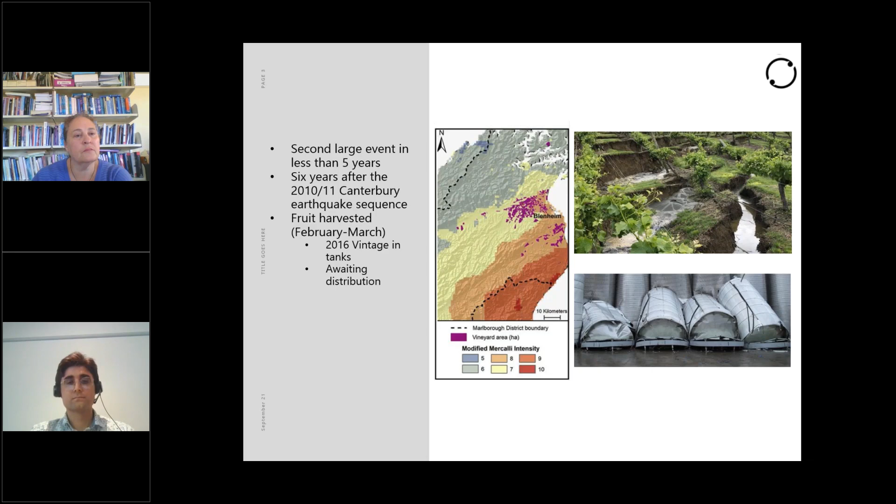For the wine industry, the earthquake came at a critical time as well. The 2016 vintage was in tanks, and it was awaiting distribution. So there was a significant volume of wine held on premises and in bottling factories when the earthquake occurred. Next.

So with funding from MPI, we were successful in starting a project enhancing earthquake resilience in the wine industry, which was funded through MPI's Primary Industries Earthquake Recovery Fund, which was initiated soon after the earthquake. The overall aim of the project, which was a collaboration between Manaaki Whenua, New Zealand Winegrowers, Lincoln and Auckland universities, was to look at key vulnerabilities and identify resilience interventions throughout the value chain. So the overall aim was to look from the vineyard through to operations and market and understand how the interaction and feedback between impacts and implications had consequences for resilience, future preparedness, and so on.

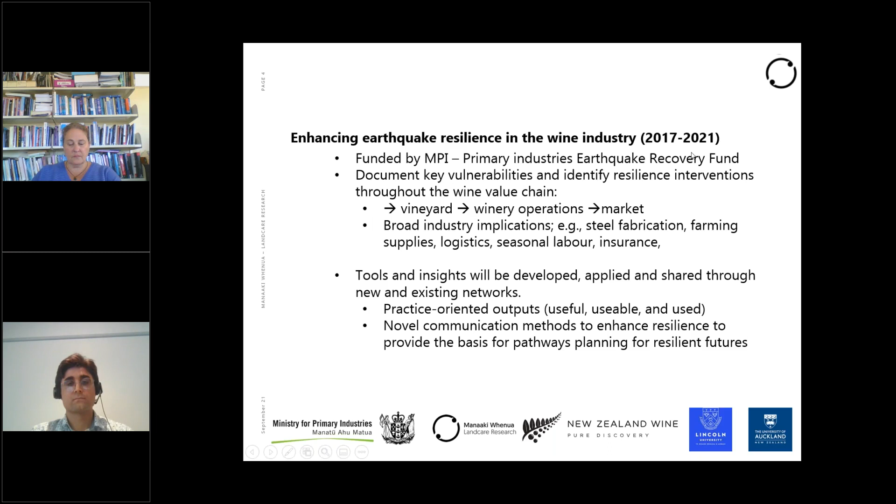The project has run for about 3 years, and then we were delayed with COVID in terms of running the actual extension and outreach. And so this portion of these webinars, as well as some fact sheets and vineyard tours coming up in the next couple of months, are really part of a way to extend the knowledge that we learned, to continue to build on the networks, and to produce outputs that are actually useful, usable, and used for the industry. Next.

So the project had 3 research aims. The first was to document the structural impacts and the wine industry response. Second was to understand the interactions between the social and ecological systems, so the markets, human behavior, decision-making, distribution, and use that information to explore new and appropriate initiatives. And finally, to initiate and enhance knowledge sharing to ensure that these lessons and experiences are shared with the rest of the wine industry.

As Mohsen will point out, Marlborough is not unique in that many of New Zealand's wine regions are actually located in significantly seismically active areas. While they may not have experienced earthquakes in the recent past, many of them, such as Hawke's Bay, have experienced them in the last century, and others are likely to experience them at some point in the future. So how the lessons and experiences from Marlborough can be transferred elsewhere, both in terms of engineering solutions as well as how to manage market-related risks, is a key objective. Next.

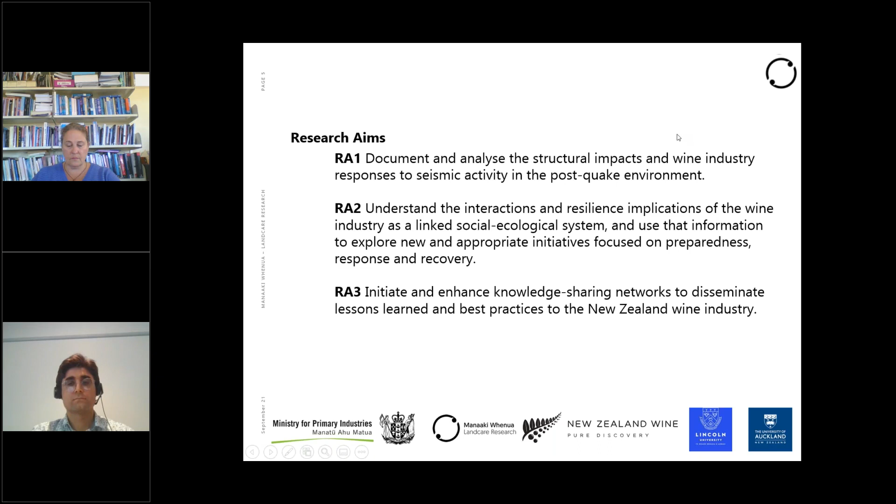And so from our perspective, where we're coming from is really this applied resilience science. Next. And when we talk about resilience, we really mean the ability to adapt. How can systems adapt? How can they reorganize? And how can we learn so that we don't continue to make the same mistakes, or when there is an earthquake or a damaging event, simply build back or revert back to pre-existing ways of doing things, in a sense, locking in vulnerabilities or patterns rather than actually transforming or changing the system. Next.

And so what we are really interested in is this ability to increase capability and capacity to buffer against shocks and stresses and to avoid critical tipping points or thresholds that may shift systems into undesirable states. And this is particularly important not only for the wine industry, but for other primary industries as they face the combined impacts of earthquakes, climate change, market-related shocks.

We've seen recently COVID, of course, having a significant impact on the wine industry. And with primary industries making up a big portion of New Zealand's economy, ensuring and enhancing the resilience of these industries is vital to our long-term future. Next.

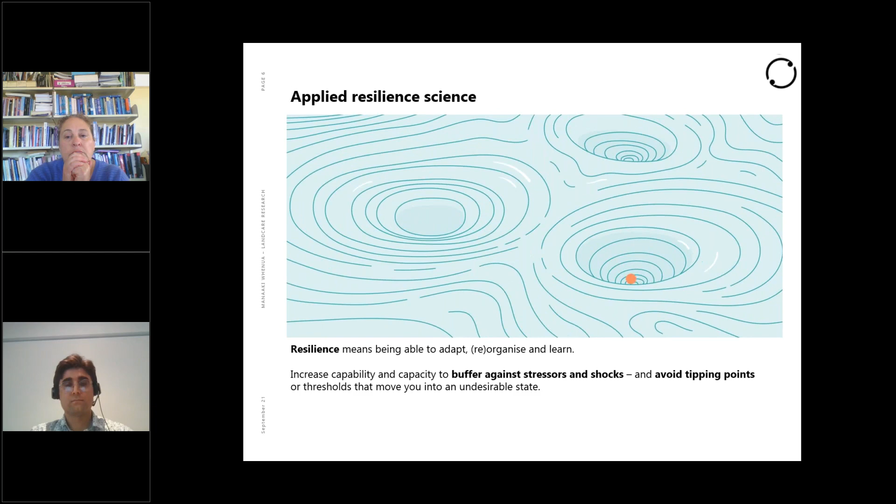And so over the next couple of months, we're presenting a series of webinars, the first of which is today, looking at seismic resilience of wine tanks and catwalks. The second one in November, we'll be reflecting on workforce resilience. The wine industry learned some significant lessons from the earthquakes and have made changes to the way they manage people. And many of those things came into play when they were needing to manage COVID response.

And so we have a webinar planned, joining producers and other industry and community representatives to discuss some of those changes and how those lessons have been applied, not only in New Zealand, but some of them have been taken up internationally as well. And finally, we'll be looking at resilience in the wine supply chain. So again, there were significant impacts for supply chain and distribution following the immediate aftermath of the earthquake. And how can we mitigate some of those risks going forward?

And what are the lessons and the similarities between the 2016 earthquake disruption and the ongoing pandemic? And how can some of those lessons be applied, and what else can be done in the future?

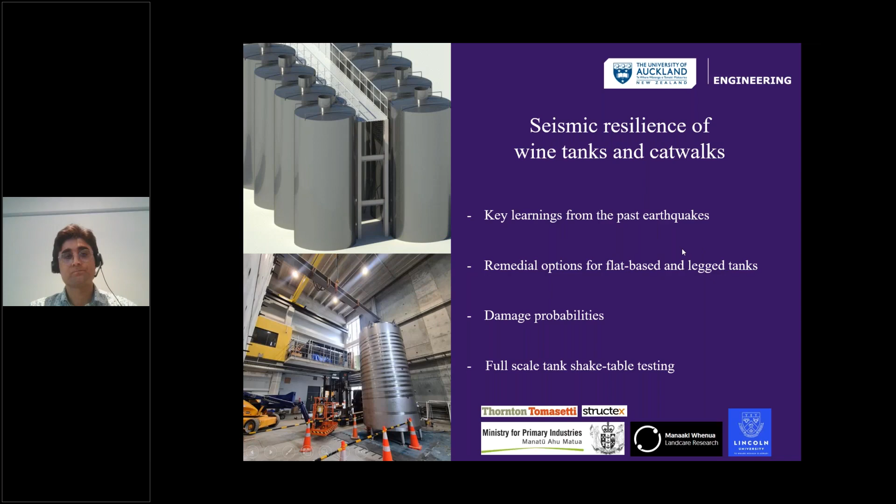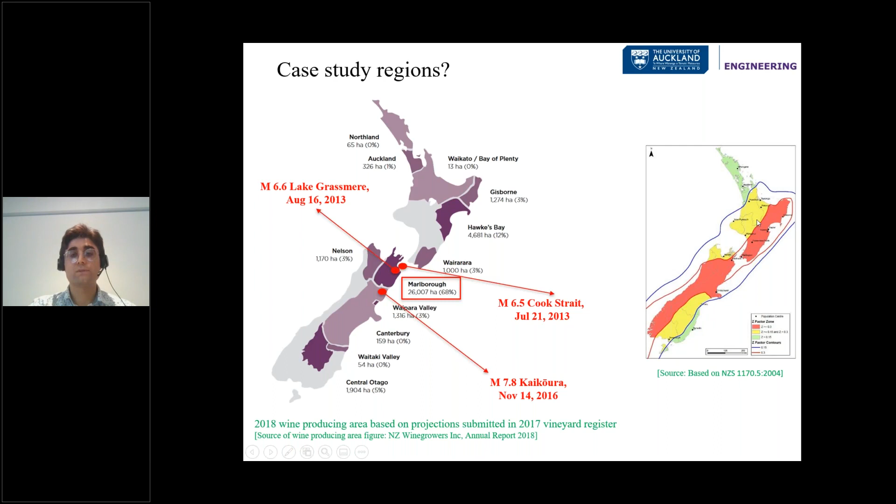Our case study region was Marlborough, and as you may know, it's a very important region in terms of wine production, and almost 70% of wine in New Zealand is produced in this area. And over the past 10 years, there have been several significant earthquakes that impacted the Marlborough region, 2 in 2013 and the 2016 Kaikōura earthquake with a magnitude of 7.8. And also, based on the New Zealand seismic map, the Marlborough region is located in a high seismic area.

There are 4 structural elements in a winery. We have buildings, and their functionality could be different, from warehouses to restaurants. We have catwalks. We have 2 types of catwalks, self-supported and tank-supported catwalks. And their main purpose is to provide access to the top part of the tank, and they are lightweight steel structures. We have also 2 types of racking system: the new generation, which performed well following our observations after the earthquake, and the old generation, which performed poorly.

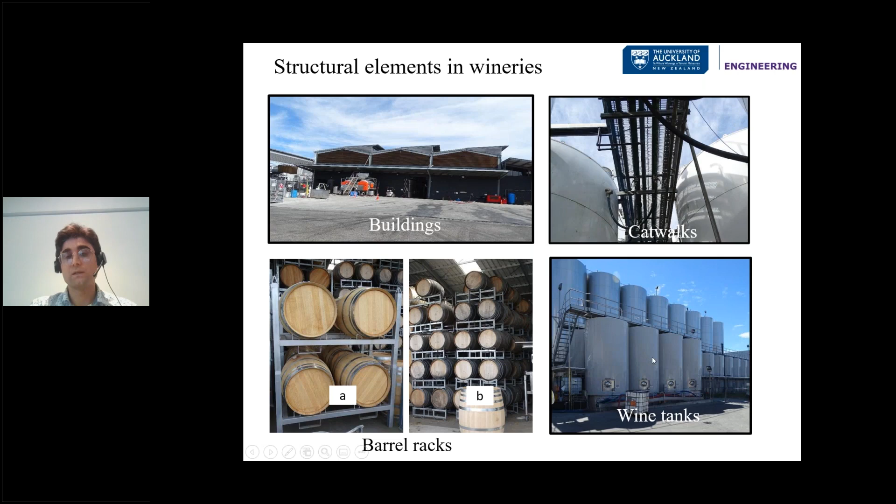And we have wine tanks. Wine tanks are slender stainless steel structures with a very thin tank wall. And the main difference between the wine tanks and other liquid storage tanks is that they are slender.

We have two types of wine tanks: flat base tanks and legged tanks. Let's have a look at a typical flat base tank.

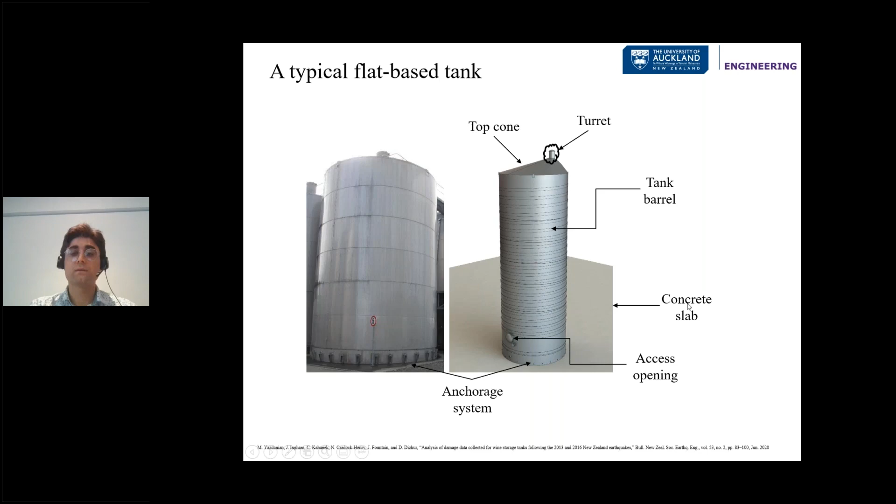Normally, flat base tanks are composed of a turret at the top of the tank, top cone or roof, tank barrel or tank wall. There are normally several openings for access on tanks, and some of these access openings are only for pipes. And we have an anchorage system, but there are different types of anchorage systems, and I will later explain about their performance during earthquakes. And we have a concrete slab sitting below the tank.

For the case of a legged tank, we have all those elements plus legs. So the tank structure is sitting on legs, and they can be either anchored or unanchored to the concrete slab.

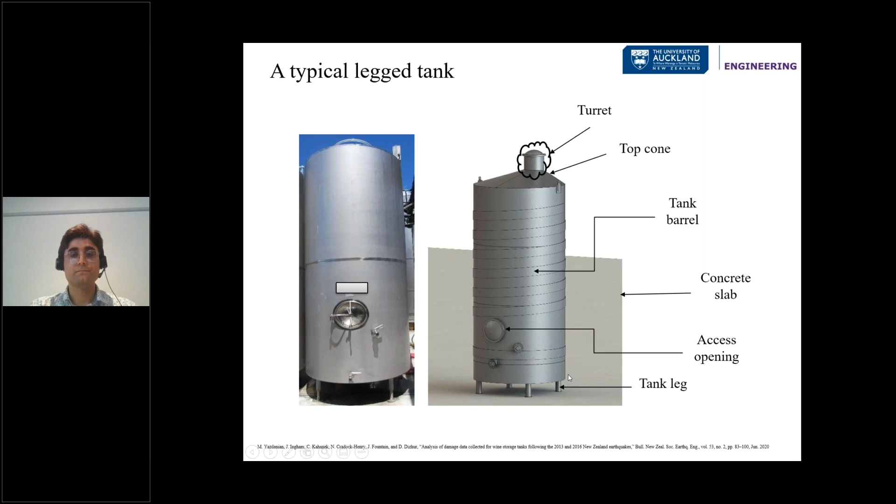Following the 2016 Kaikōura earthquake, we teamed up with structural engineers, and we inspected several wineries, and we held several workshops, and all in all, we collected the largest damage database for wine storage tanks in the world, which is basically composed of two damage data sets, and today I'm only talking about the largest damage data set that we have. Our damage data set was covering both flat-based and legged tanks, and also covering data from the 2013 earthquakes and 2016 earthquakes.

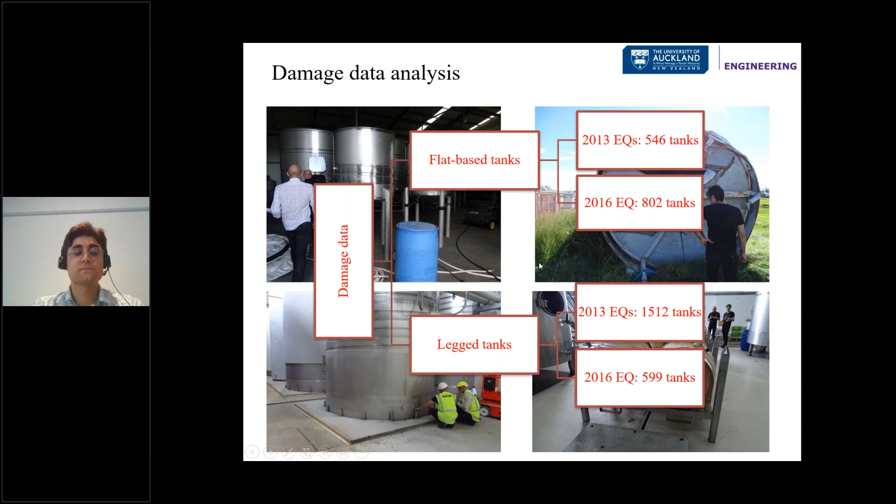So let's see an analysis of this damage data. This is a very high-level overall damage data. We have analyzed all data in detail, but because of time, I will just give an overall percentage.

For the case of flat-based tanks, in the 2013 earthquakes, we noted that 73% of the tanks in our inventory sustained damage, while this damage percentage reduced to 69% in the 2016 Kaikōura earthquake. Although this earthquake had a larger magnitude compared with the 2013 earthquake, the damage percentage still reduced, which could be because some resilience measures were undertaken following the 2013 earthquakes, and some lessons were learned from that earthquake. That shows a good point that possibly, because of the lessons learned from the 2013 and 2016 earthquakes, wineries may now have more resilience.

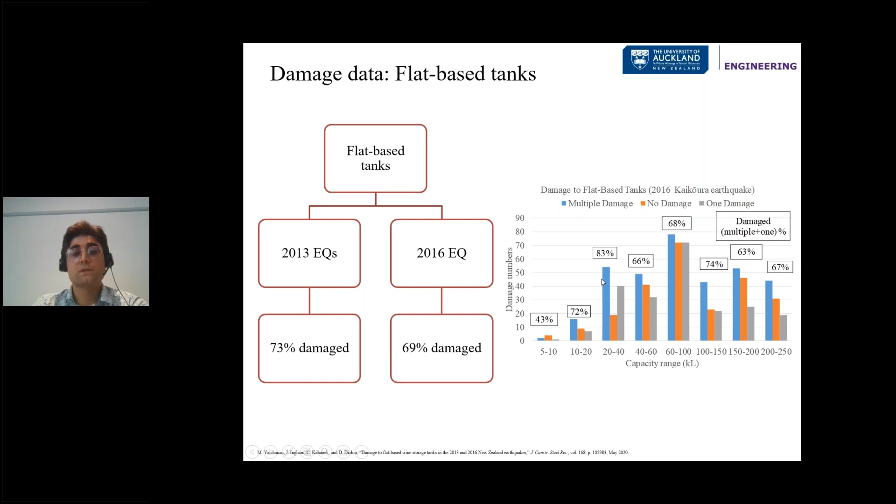We also analyzed the percentage of damage for different capacity ranges. On the horizontal line, we have capacity ranges, and we have damage percentage for each capacity group. Surprisingly, we can see that tanks with a capacity range of 20 to 40 kiloliters sustained the largest damage in the 2016 Kaikōura earthquake. It was interesting to see that some of the largest wine tanks sustained less damage compared with smaller tanks.

We also analyzed damage percentage to different sections of the tank. Based on our damage data from the 2013 and 2016 earthquakes, we can see that damage percentage to anchors reduced from 47% in 2013 to 23% in 2016. That is because we noticed that several wineries actually implemented and used novel anchorage systems, and that shows the importance of resilience.

But damage percentage to the barrel increased from 28% to 54%. Some of the typical types of damage to the barrels, and the most important types of damage, are diamond shape buckling—named because it's similar to a diamond—elephant foot buckling, as well as catwalk indent. Catwalk indent impacted the tank significantly, and I will explain about this later.

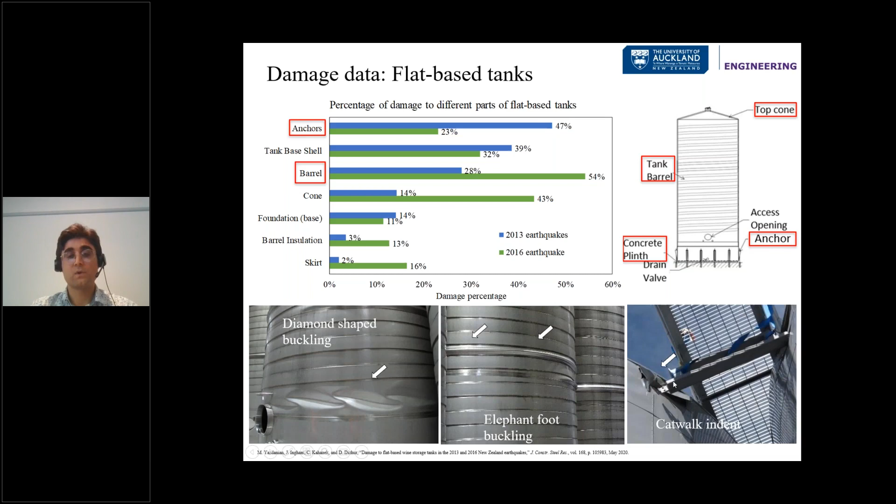We also investigated the performance of tanks with different anchorage systems, and we analyzed all the data that we had and identified that tanks with energy dissipation devices sustained less damage compared with other tanks. That again shows the importance of having a resilience option in place.

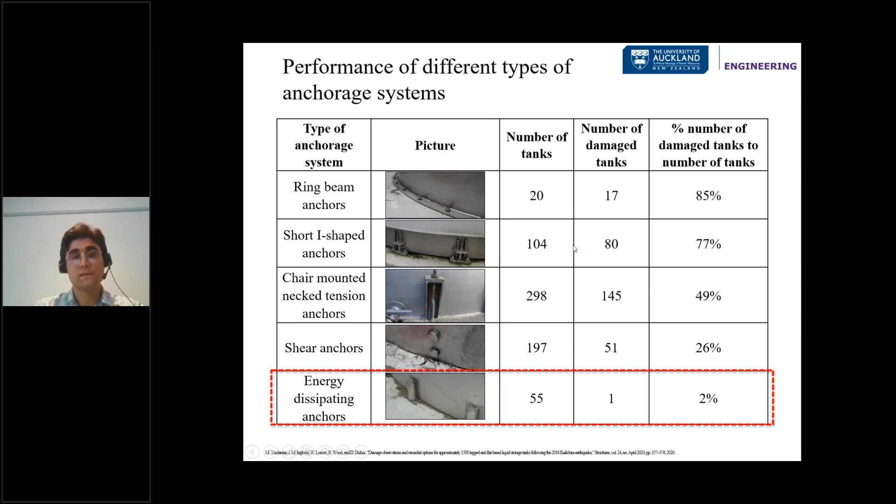For the case of legged tanks, we found in our data that 50% of the tanks sustained damage in the 2013 earthquakes, and this damage percentage increased to 57% in the 2016 Kaikōura earthquake. That makes sense because the Kaikōura earthquake had a larger magnitude. Again, similar figures are extracted for the legged tanks, when we look at damage percentage for tanks with different capacity ranges. Unlike flat-based tanks, we can see that the percentage of damage increased for the case of legged tanks.

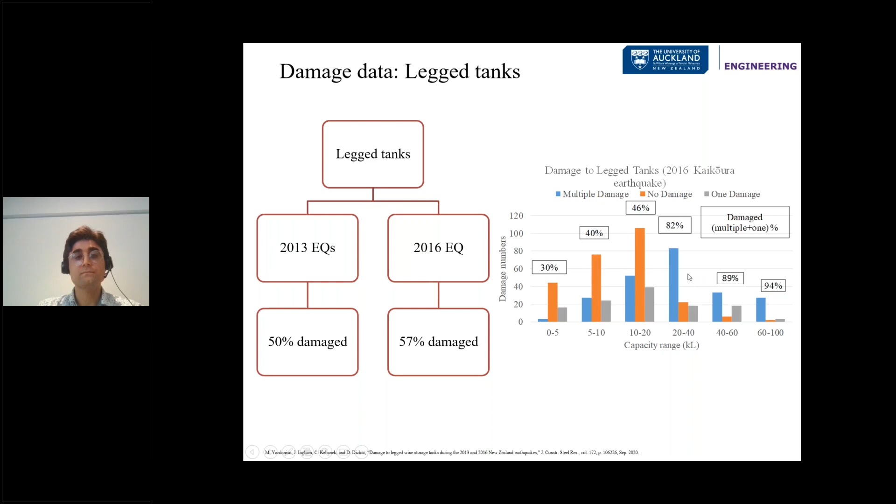We also analyzed the damage percentage to different sections of the tank, and as expected, we noted that legs or the frame of the tank sustained the largest damage in both the 2013 and 2016 earthquakes. Some of the typical damage to the legs are leg buckling, external or internal leg tilting, brace buckling, and global movement. Global movement means that the tank has shifted to the other side, and that can be identified by looking at the signs left in its original location.

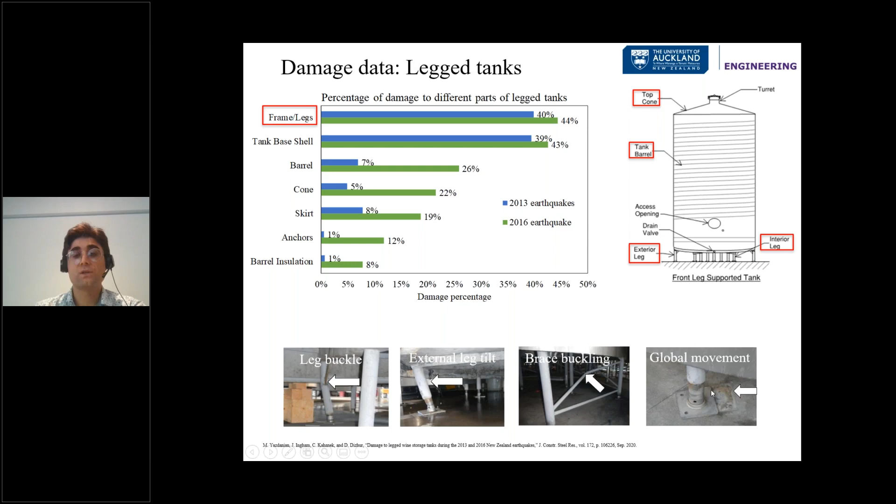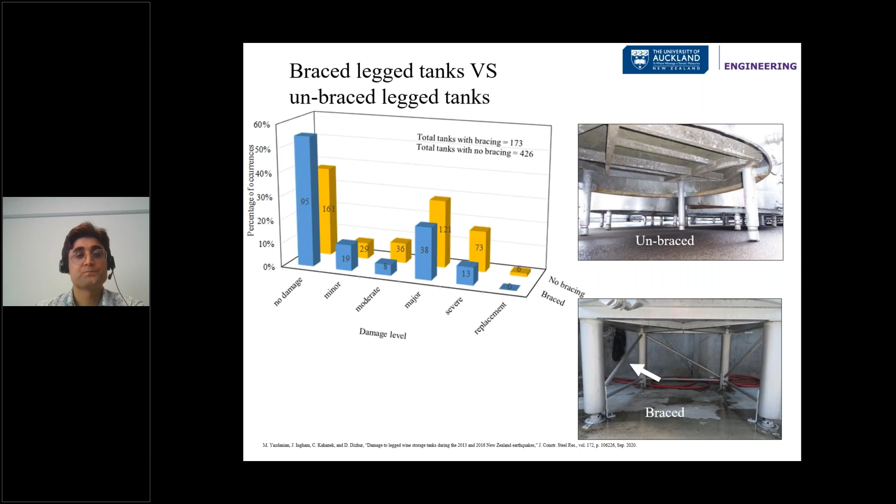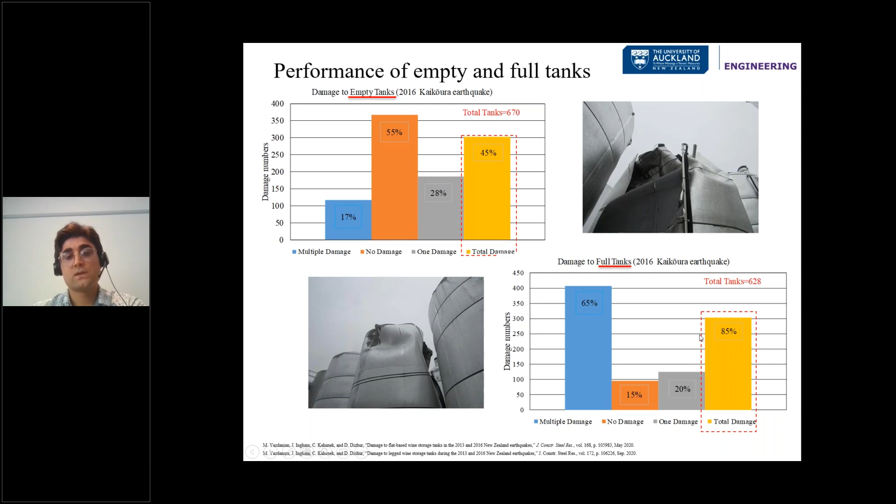We also investigated the performance of empty and full tanks. On the top of the slide, we have the figures for empty tanks, and you can see that the total percentage of damage for empty tanks was 45%, while the percentage of damage to the full tanks on the bottom of the slide was nearly twice at 85%. That shows the importance of liquid level and how it can impact the performance of the tank.

Some of the key learnings from our wine tank damage data are written here. Basically, the damage type that caused tank replacement based on our observation was pounding and overturning, and that was because some legged tanks could overturn or impact their neighboring tanks. Some parameters influencing the damage percentage were level of liquid, the capacity of the tank, and the anchorage system.

We also understood that 86% of tanks with damaged anchors required or at least recommended anchor replacement. And above 90% of tanks having buckling, such as elephant foot buckling or diamond shape buckling, require different sorts of repairs. And as I discussed, braced legged tanks perform better than unbraced legged tanks.

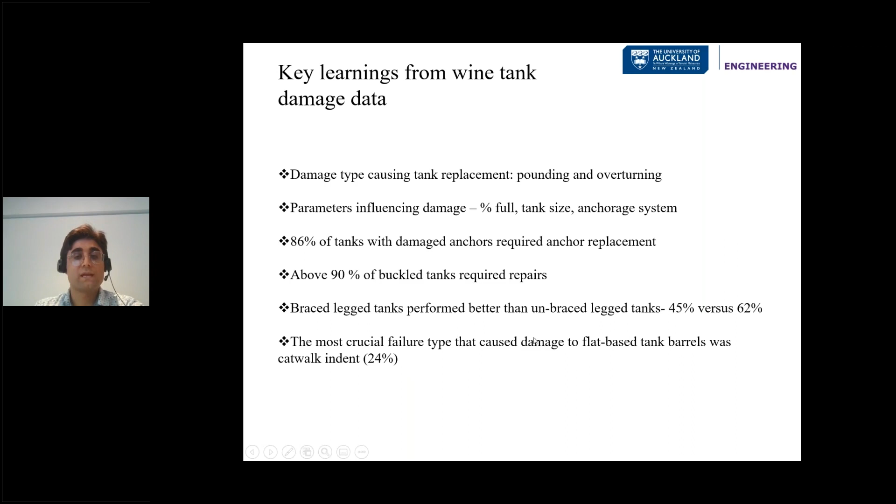One of the surprising and interesting things that we noted in our data was related to catwalks and how they can impact the wine tanks. Based on our data, we understood that 24% catwalk indent was noted for flat-based tanks. And that led us to start new research on the seismic performance of catwalks.

We have two types of catwalks: tank-supported catwalks, when the catwalk has a joint with the tank wall and the tank is acting as the main frame or support for the catwalk. And on the right, we can see self-supported catwalks, when the catwalk structure is sitting on its own frame, and in some cases it has bracing, and it can be designed according to the New Zealand steel design standard.

Based on our data, we understood that following the earthquake, and it might be different now, tank-supported catwalks were more frequently used in the New Zealand wine industry. Self-supported catwalks obviously performed much better, with only 1% sustaining damage or 5% causing any sort of damage to either tank wall or tank cone. While tank-supported catwalks performed poorly, with 25% of them sustaining damage and 36% causing damage to the wine tank.

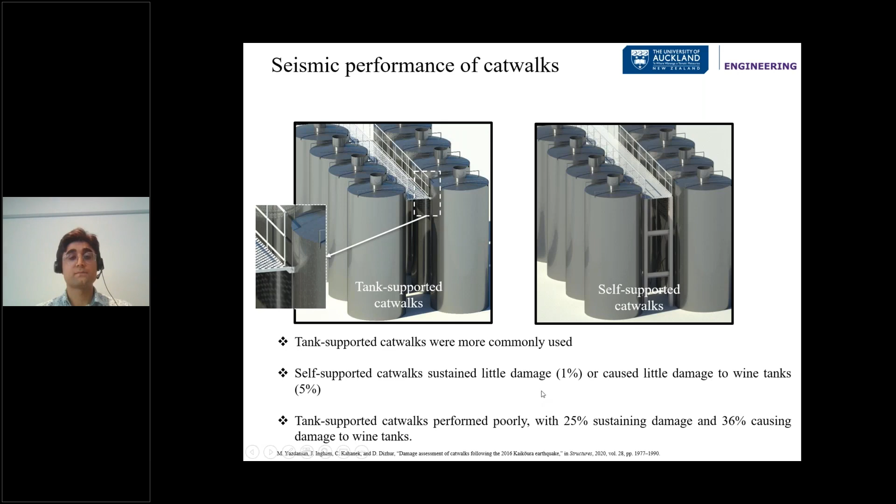On our data, we found out that there are two main reasons for damage. One of them was insufficient distance between the catwalk structure and the tank. When we identified collision between the catwalk and tank structure, either the cone or the wall.

Another reason was indent on the connection between tank and catwalk. Just to give you further information, the tank wall, as I said, is very thin, and imagine a 2 mm tank wall is impacted during an earthquake, or moves towards the catwalk, or the catwalk moves toward the tank wall, and it can cause damage to the tank wall structure or vice versa.

We believe there are two proposed solutions that need engineering details to reduce the probability of damage from collision between catwalk and tank. A sufficient distance between the tank structure and catwalk needs to be designed, and to reduce the probability of damage arising from the tank-catwalk connection, sliding joints can be put into place so that the tank and catwalk can move independently of each other.

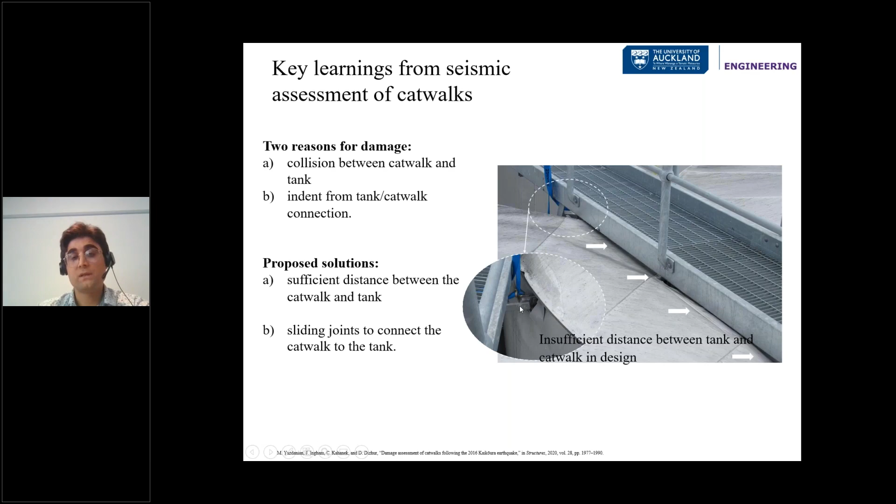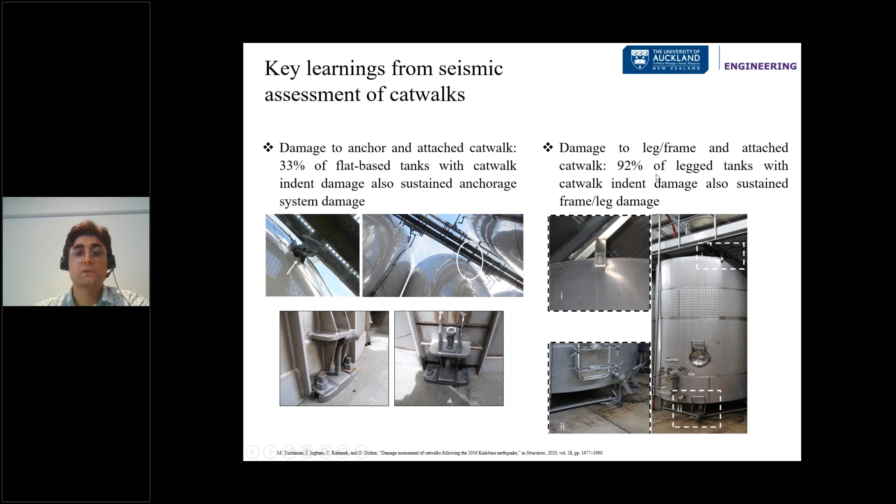Based on our damage assessment, we also noted an indication of relation between the performance of tank anchorage system or legs with the catwalk indent, for the case when the tank has a catwalk attached to it. 33% of flat-based tanks with catwalk indent also sustained anchorage system failure, and that percentage was 92% for legged tanks with catwalk indent, which also sustained leg frame damage.

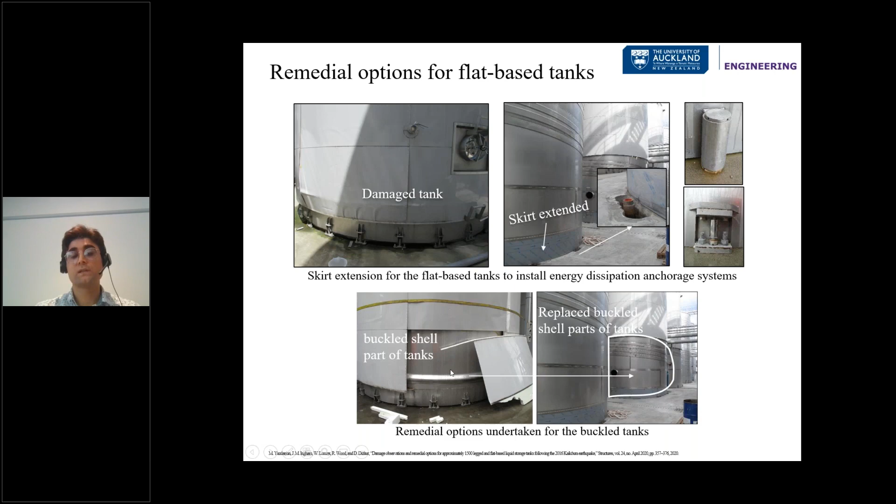We also investigated the remedial options that were recommended and followed for flat-based tanks and legged tanks. For flat-based tanks, one typical remedial solution was to extend the skirt and add an anchorage system, an energy dissipation anchorage system. Another option was to remove the isolation layer to find the buckled shell part of the tank, then remove that buckled shell and replace it with a new section.

For legged tanks, we understood there were cases when the damaged tank was converted from legged tank to flat-based tank, done by extending the skirt and adding an anchorage system to the skirt. One temporary solution for the damaged legged tank was to add and weld a steel plate to the buckled leg tank, but that was only a temporary solution.

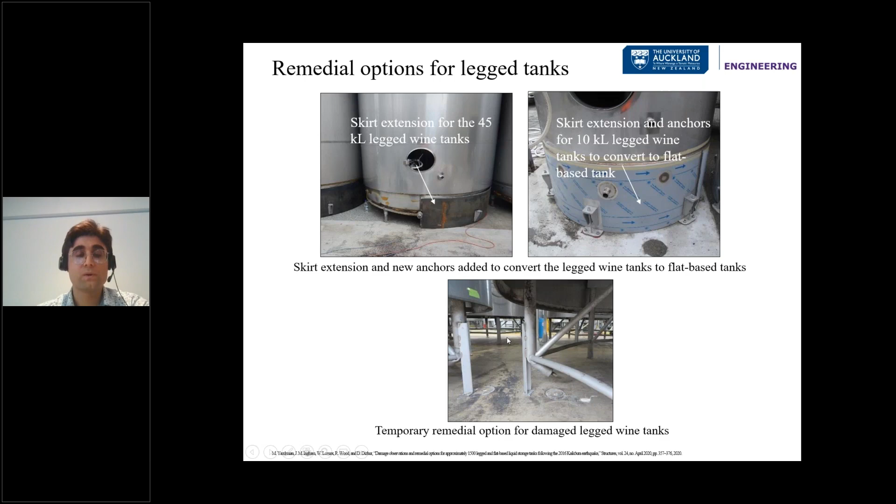Based on our data and the peak ground acceleration values we could estimate, we could produce fragility curves. Just to give background on fragility curves, they are a tool that can provide probability of financial loss and probability of earthquake damage to structures during future earthquakes. So we could estimate the peak ground acceleration, and based on the damage data we had, we spent a lot of time to produce damage states.

That was particularly difficult because there were no guidelines for the introduction of damage states for the case of wine storage tanks, but we used some of the available guidelines and tried to match them with reality. So we again considered both tank types, flat-based tanks and legged tanks, and produced fragility curves based on different capacity and liquid level.

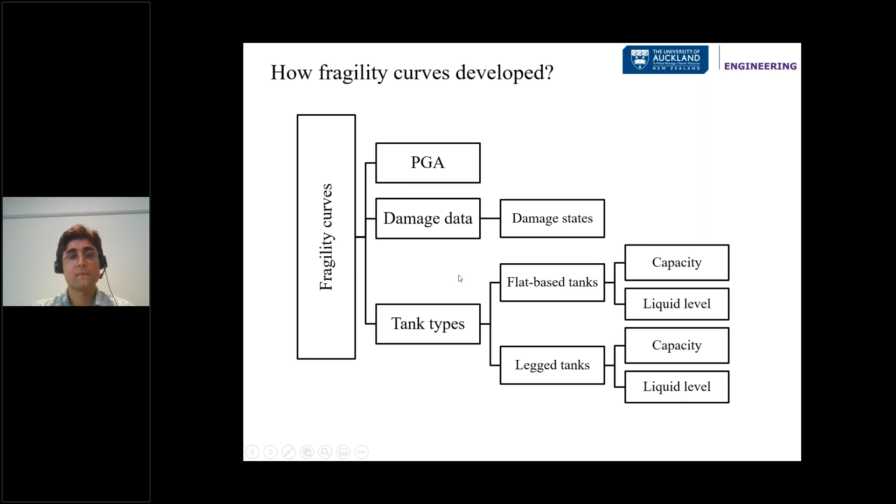Let's have a quick look at our damage states. We had 6 damage states. Damage state 1 was when there was no damage, and no repair was required. Damage state 2 was when no repair was required, and we think the approximate repair cost would be negligible, maybe 0 to 10% of the replacement cost.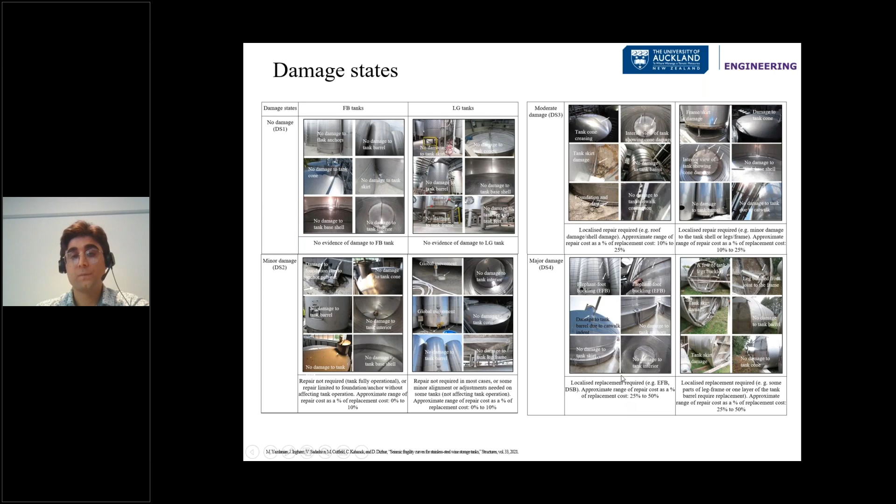For damage state 3, or moderate damage, the approximate range of repair was between 10 to 25% of replacement cost. For damage state 4, localized replacement was required, and the approximate range of repair cost was 25 to 50% of replacement cost.

For damage state 5, severe damage, the tank sustained significant elephant foot buckling and diamond shape buckling, and section replacement is required; the damage can be significant, with an approximate repair cost of 50 to 75% of replacement cost. Complete damage was when repair was not possible, or beyond repair, with an approximate range of 75 to 100%.

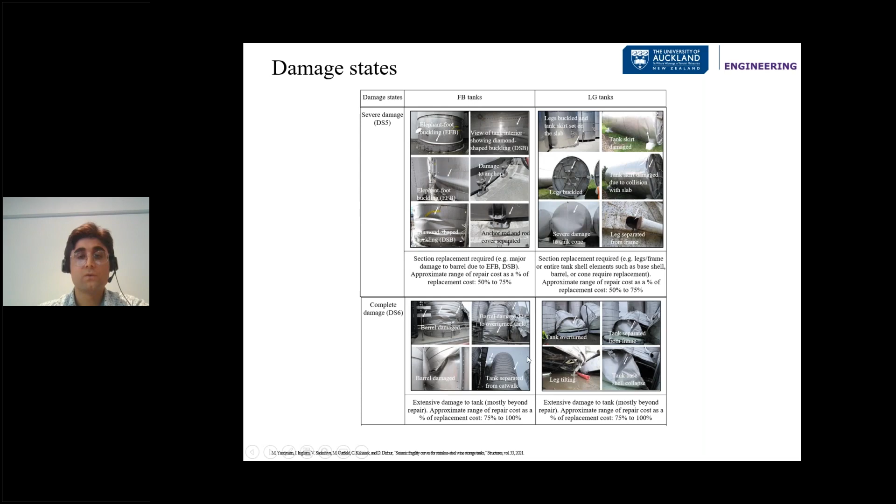This is our fragility curve for flat base tanks. As I said, we developed fragility curves for empty and full tanks. On the left of the slide you can see the fragility curves for empty tanks, and on the right for full tanks. Most of this is based on the data we had and the peak ground acceleration that was estimated. Most of our data was between 0 to 0.5 G. Just to show you how it works, we have peak ground acceleration on the horizontal axis and probability of damage on the vertical axis.

Imagine an earthquake that creates a peak ground acceleration of 1 occurs, which is actually 2.5 times the maximum peak ground acceleration we had for wineries in our damage data. The probability of damage would be around 20% when the flat base tank is empty, and when the flat base tank is full, that percentage can go up to about 70%.

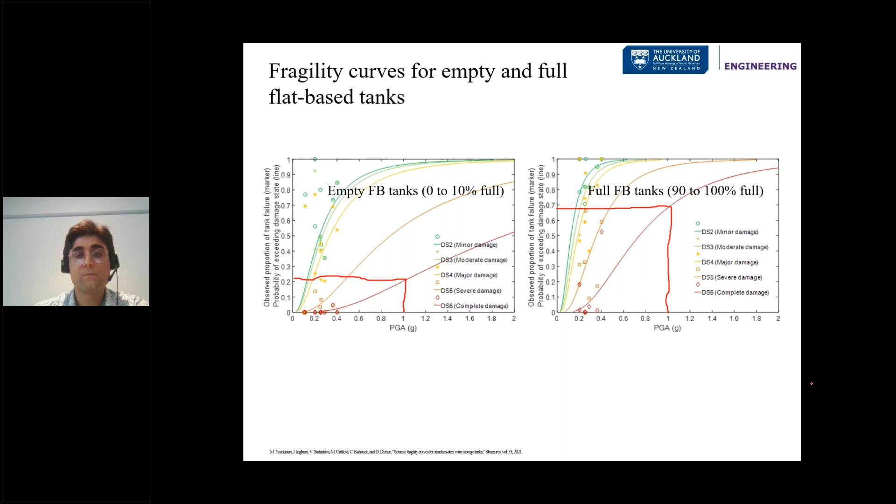So that's a really good tool that provides the opportunity to estimate the probability of damage and also some losses. We have similar data, and we could develop similar fragility curves for the case of legged tanks. As you can see, probability of damage for full legged tanks is higher than the probability of damage for empty legged tanks.

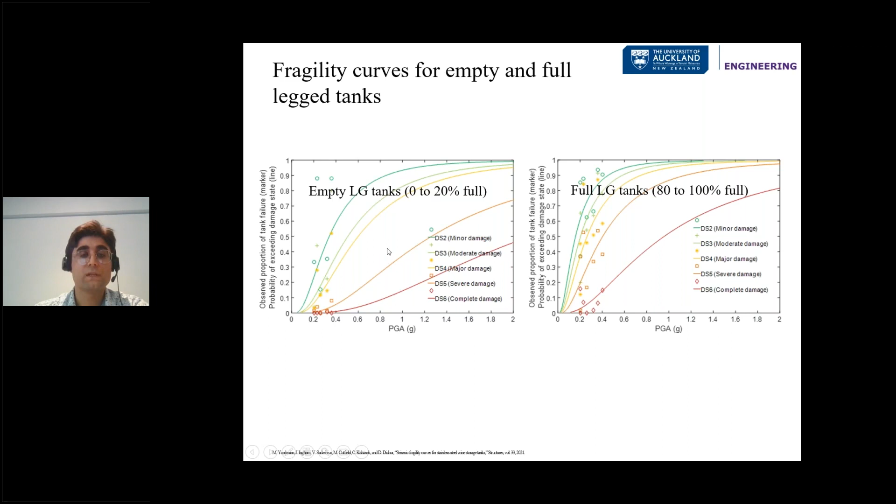We did also a shaking table test. Thanks to one of the wineries and nice people there, we could bring a legged tank into the University of Auckland structural testing lab. The tank size was huge, so I put a figure of myself to show the scale compared to the tank. I have a height of 1.8 meters, and the tank had a 6-meter height, so you can see how big the tank was.

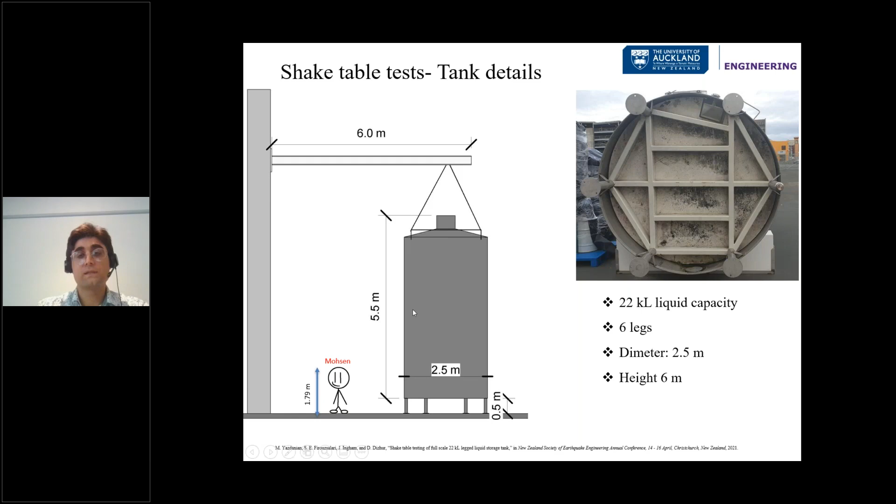We developed a test program. We attached approximately 40 instruments to the tank wall and legs of the structure to measure acceleration, strain values, and global movement of the tank. You can see that all those cables attached to the tank are all going along to be attached to our data acquisition system.

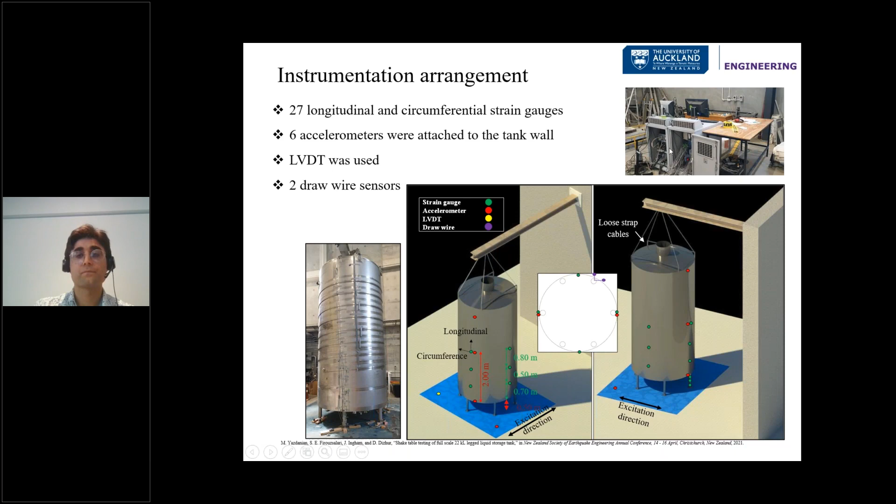We consider 3 different base conditions: unanchored, laterally anchored, and fully anchored. When the tank is only laterally anchored, it can move upward or vertically. When the tank is fully anchored, it is completely anchored both laterally and vertically.

In order to reduce hazards from possible overturning, we used a steel beam. One end of the steel beam was connected to the concrete strong wall, and the other end was connected to the tank using strap cables.

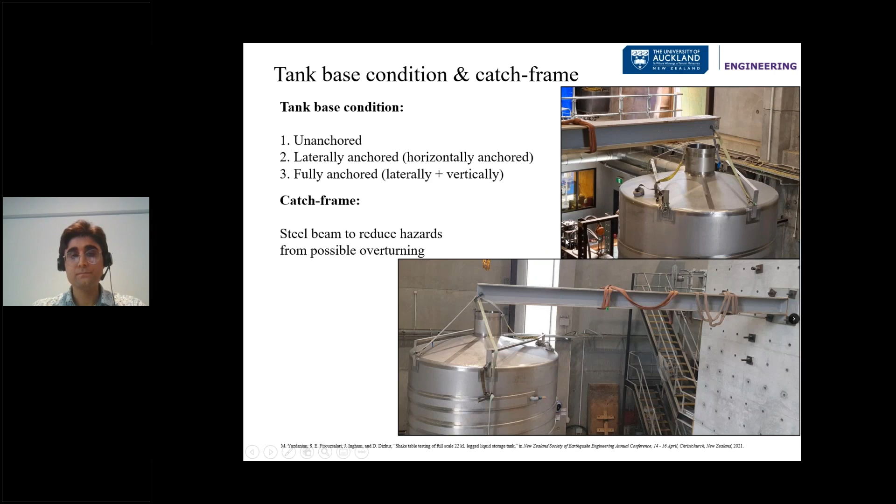We considered 3 different types of testing: impulse test to identify the natural frequency of the structure, harmonic test which is kind of artificial shaking where you can give different frequencies and varying shaking levels to a structure, and we also considered earthquake record tests, using Christchurch and Chile earthquake records.

Just to give some background about the Chile earthquake: the Chile earthquake in 2010 caused substantial financial losses to the wineries in Chile, and the earthquake shaking was recorded at about 1G, which is about 2.5 times the maximum peak ground acceleration estimate that we had for wineries in our data.

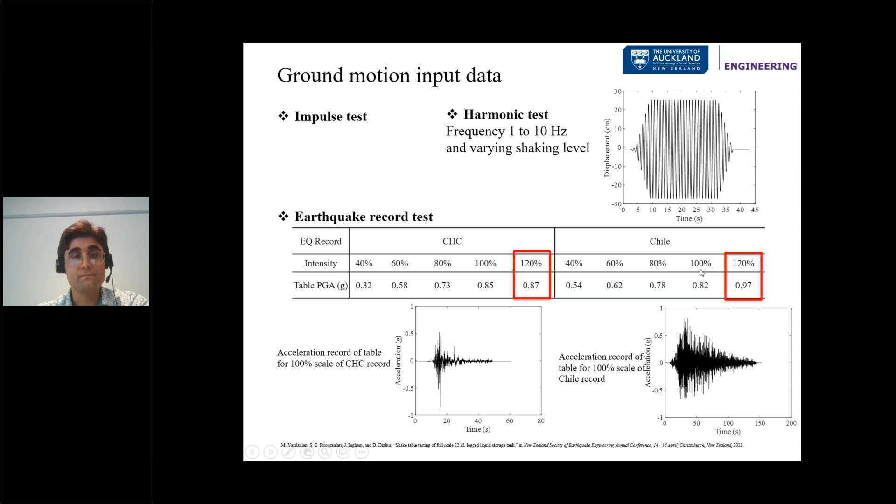Let's see some of the videos that can better explain the tests. This is a harmonic test, frequency 2 Hz and peak ground acceleration of 0.4 G. You can see the tank shaking on the shake table, and that is really important, particularly for the case when the tank has a catwalk, pipe, or any other structure attached to it, or when it can impact neighboring legged tanks or flat base tanks.

You can see this is a harmonic test, so the shaking is more steady. Here is a view of one of the legs during the harmonic test, just to show how the leg can move during the earthquake. There is a huge noise that I'm hearing, but unfortunately I think it's only me that's hearing that - it's really scary sometimes.

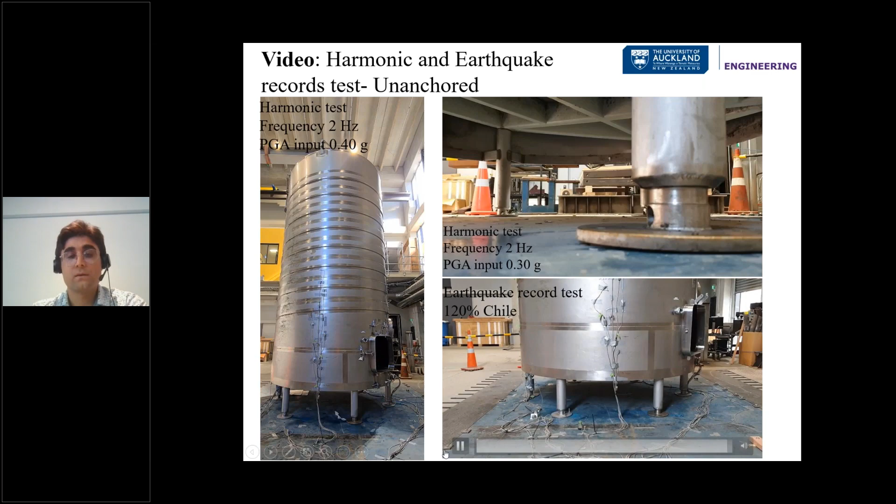Normally an earthquake typically starts slowly, then has some ups and downs, and then reduces. We have also a shaking table test for when the tank is laterally anchored, so it can move and rock, and when the tank is fully anchored. Let's see and compare the results, when 130% of the Chile earthquake is considered as input.

You can see that the tank starts shaking, going up and coming down. That collision with the shake table again creates a lot of noise.

Now when the tank is fully anchored and a similar earthquake record is used as input, we can compare the results. All these cables - we had a lot of challenge connecting them so that they don't go under the tank, particularly when the tank was unanchored. But you can see that the legs and other parts of the tank are all instrumented, so you cannot see any lateral or rocking movement of the tank.

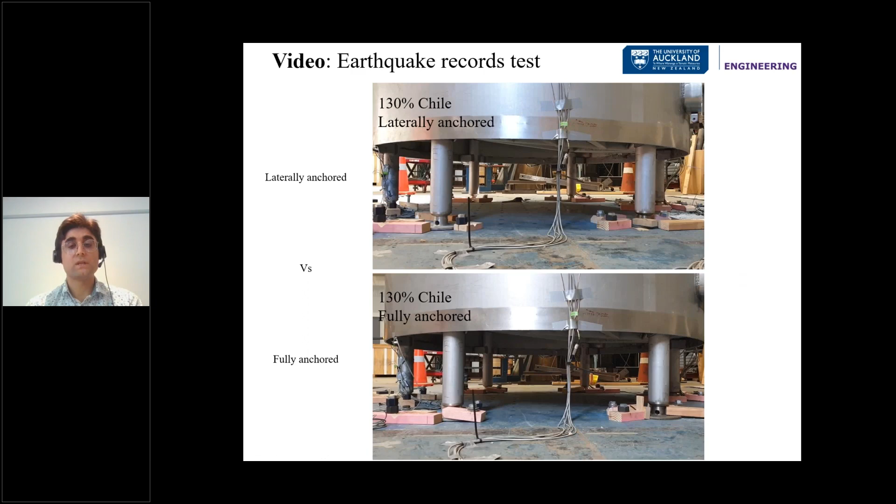And also we understood from our damage database that the percentage and level of strain on the legs was more than the strain on the tank wall. We also found that the percentage of damage to the legs is more than other sections of the tanks.